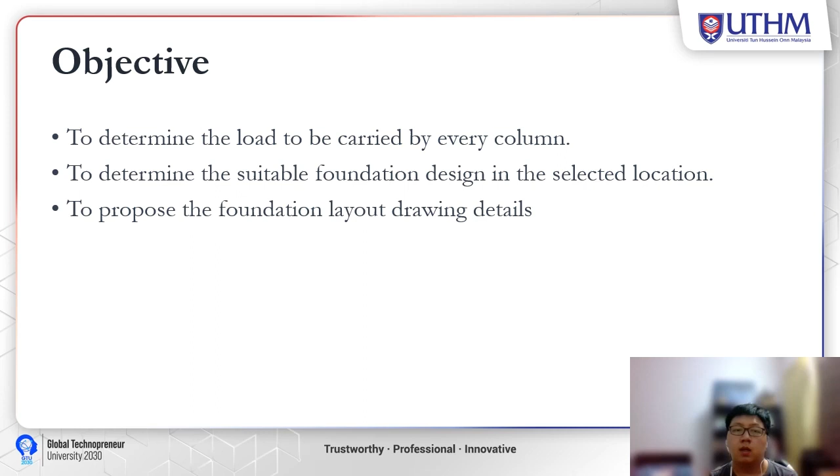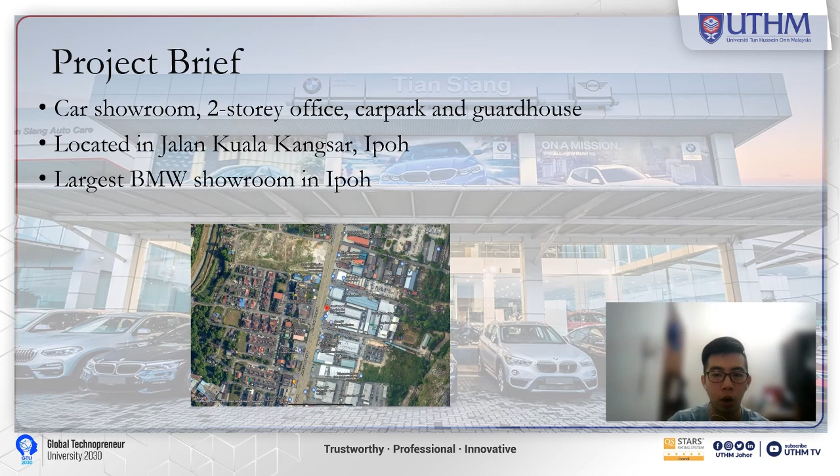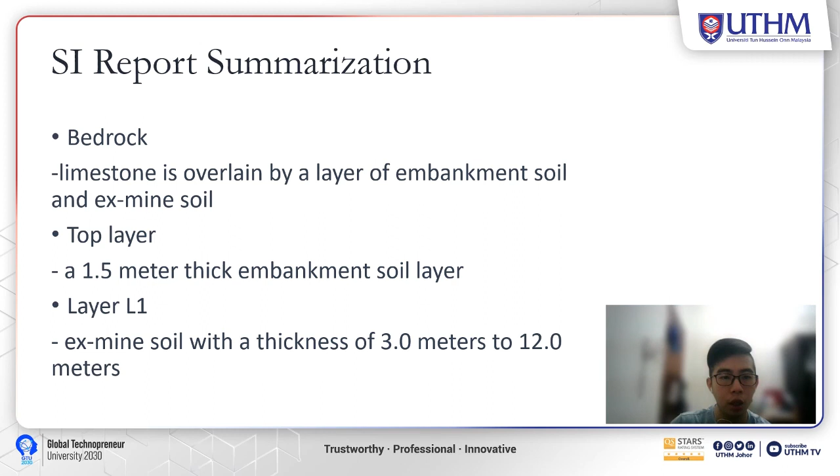Next, let's talk about the soil investigation report. The investigation carried out showed that the bedrock of the investigation site area consists of limestone overlaid by a layer of embankment soil and ex-mine soil. Observational data show that the top layer consists of a 1.5 meter thick embankment soil layer, and layer 1 consists of ex-mine soil with a thickness of 3 meters to 12 meters.

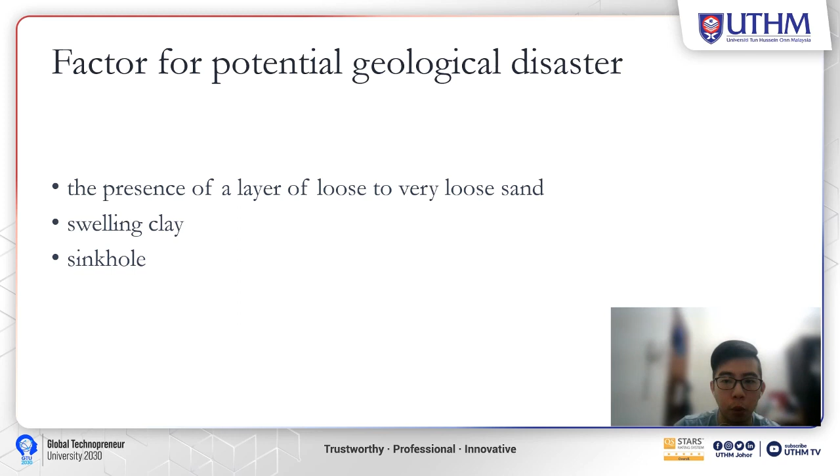The investigation carried out identified some factors for potential geological disaster that need attention, which are the presence of layers of loose to very loose sand, swelling clay, and sinkholes. Based on the report, we have no objection to the development if appropriate mitigation measures are given attention according to appropriate guidelines, and the work carried out is under the supervision of a professional geotechnical engineer.

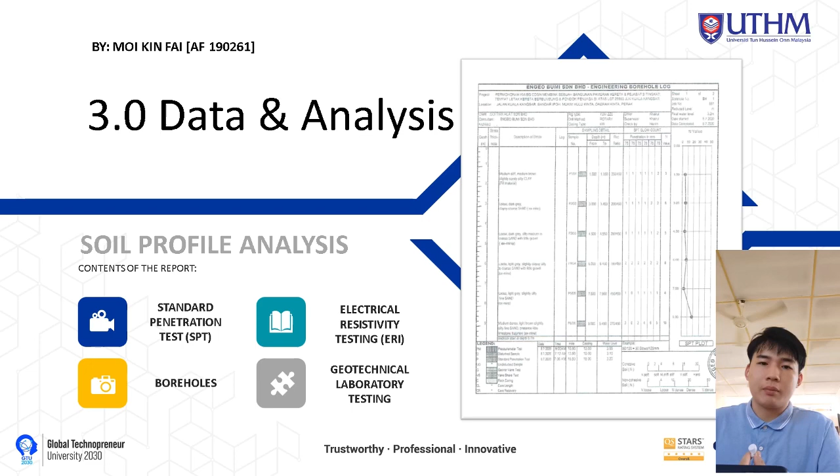The geotechnical report has identified two critical boreholes on the site, named BH1 and BH2 respectively. They utilize electrical resistivity testing, SPT, and some geotechnical laboratory testing for figuring out the mechanical and chemical properties of the disturbed soil sampling in the boring. As previously mentioned, they discovered that the subsurface consists of clay, dense compact sand, and limestone.

Some of the building specifications have been outlined following client specifications. The thickness of the slab on the ground floor and first floor is 100 mm and 125 mm respectively. The soil characteristics and the location of the heavy load cause the variation in the size of the column. Stump height varies between 500 to 1000 mm. The floor ground beams measure 225 x 600 or 125 x 600. High yield and mild steel are used as reinforcement for the in-situ concrete.

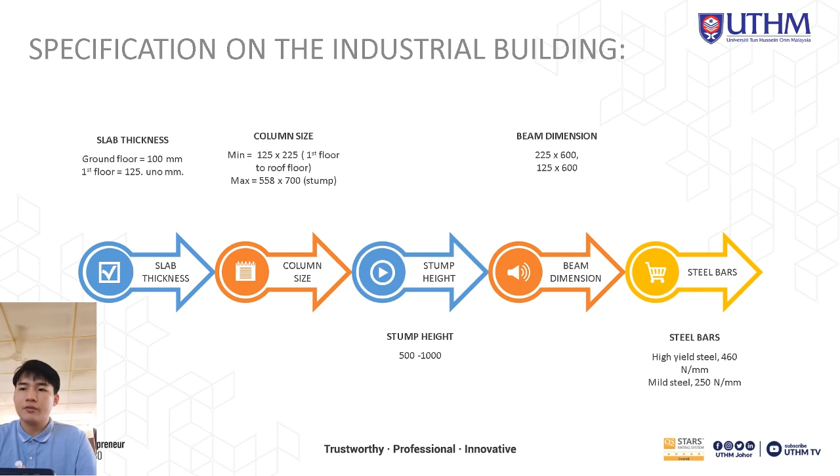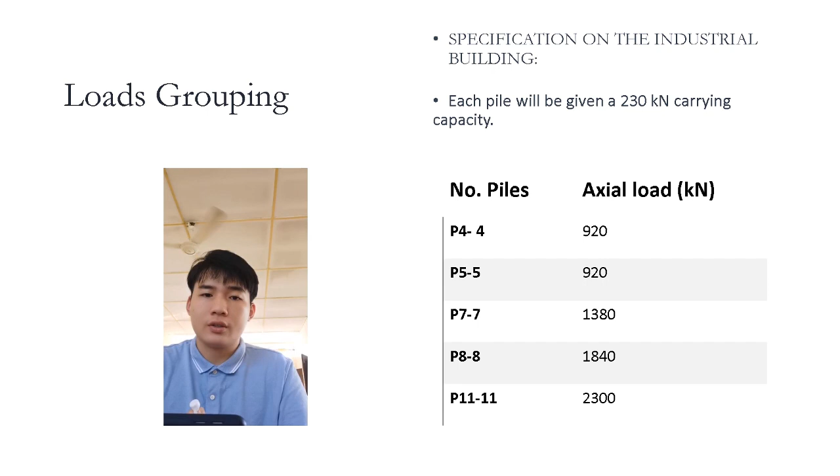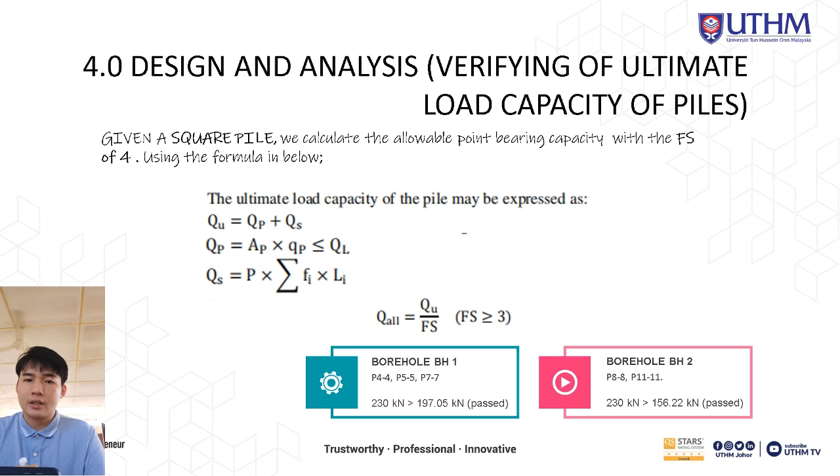Hi, my name is Liew and today I will be presenting total settlement and factor of safety.

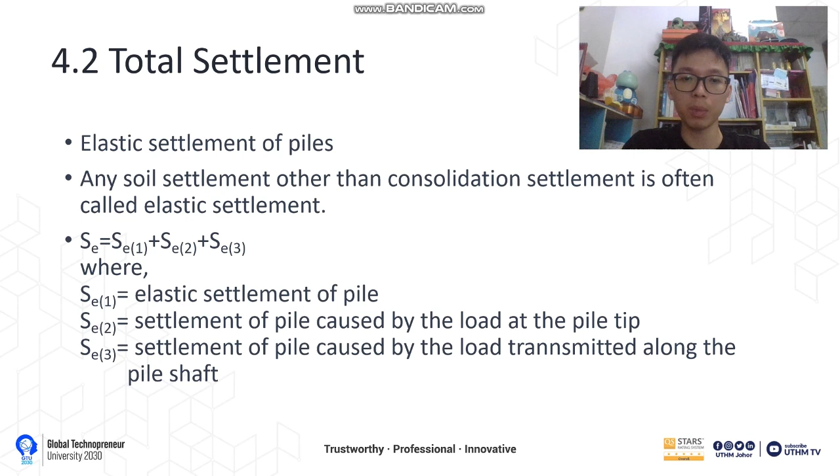In our project, we are using elastic settlement of piles, and the definition for the elastic settlement of piles is any soil settlement other than consolidation settlement. So the equation for the elastic settlement is SE = SE1 + SE2 + SE3, where SE1 equals the elastic settlement of piles, SE2 equals the settlement of pile caused by the load at the pile tip, and SE3 is the settlement of pile caused by the load transmitted along the pile shaft.

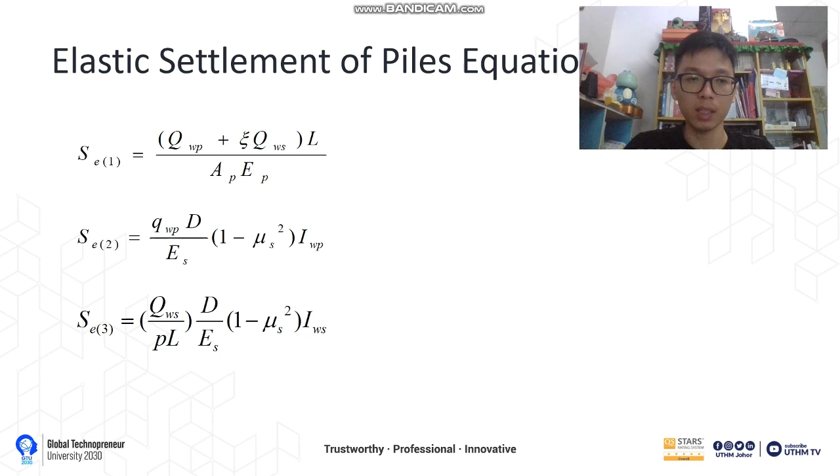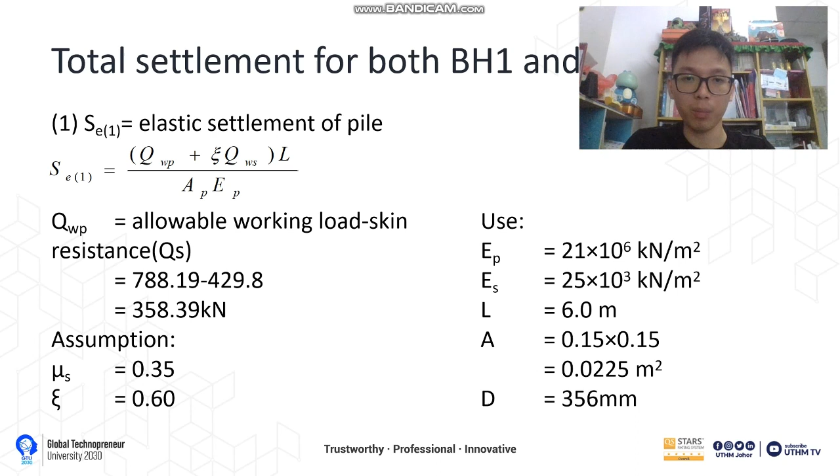Next we proceed to the equations, and here are the equations for the respective elastic settlements. I'm giving the example for borehole 1 in this calculation. So let's proceed to the borehole 1 calculation. The allowable working load and skin resistance we got from the previous session. So we proceed with the calculation and substitute all the parameters into equations SE1, SE2, and SE3.

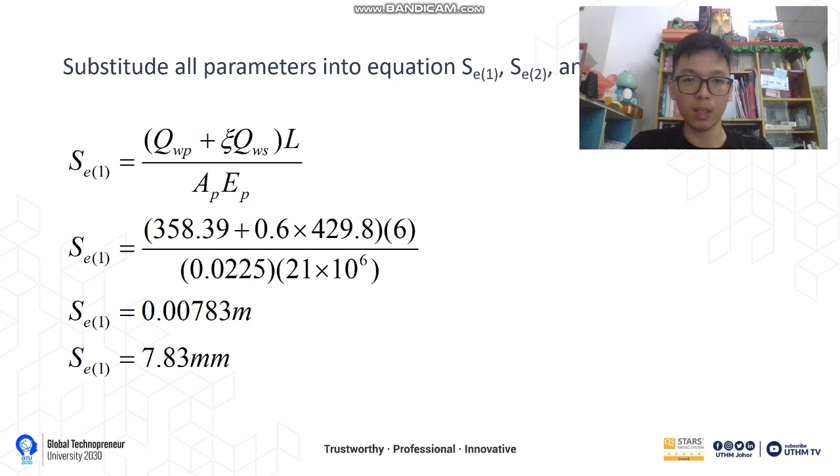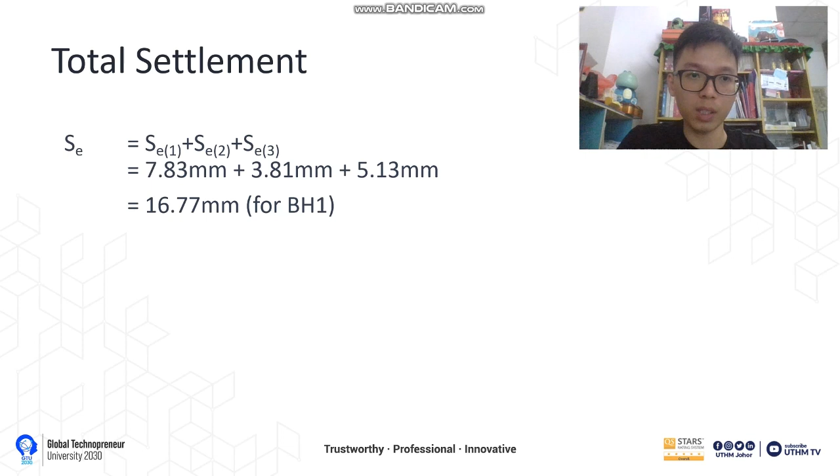So in this example, for SE1 we got the value of 7.83 millimeters, SE2 we got 3.81 millimeters, and SE3 we got 5.13 millimeters. And then we summarize the total settlement, and we got 16.77 millimeters for borehole 1.

Next, we proceed to the factor of safety. In the previous session we have the Q design of 230 kilonewtons, and we already got the Q ultimate, which is equal to 788.19 kilonewtons. To calculate the factor of safety, we just divide the Q ultimate by Q design. So in this calculation, we got a factor of safety of 3.43, which is larger than 1. So this is acceptable.

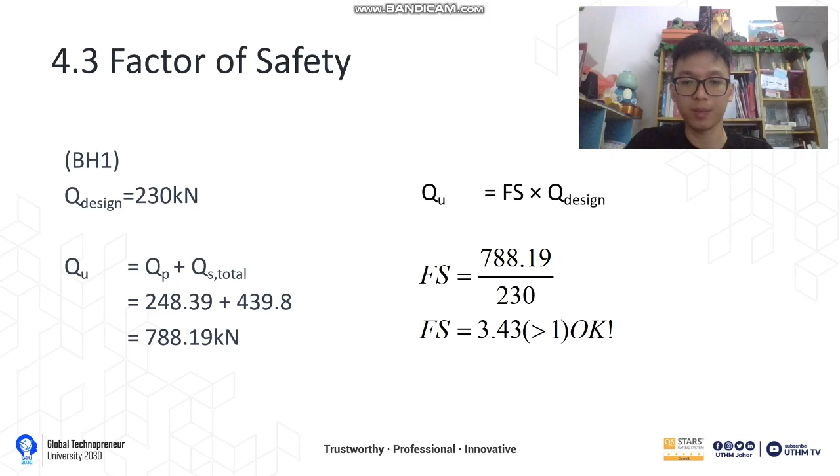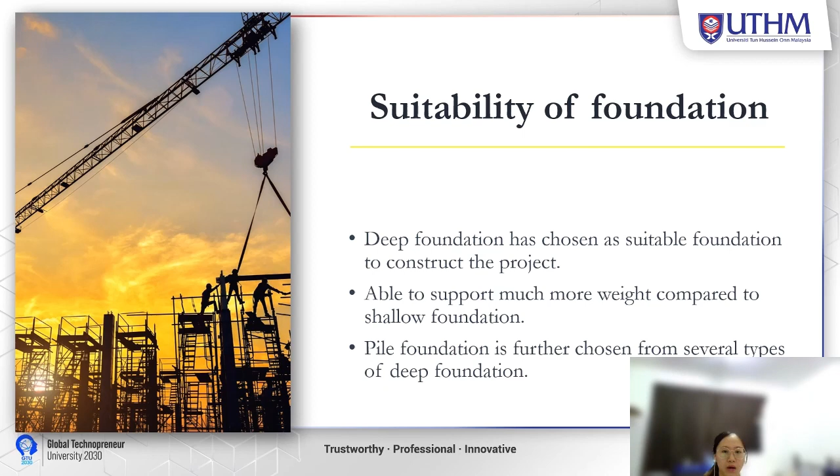Now I will continue to talk about the discussion and conclusion of our project. Based on the calculations we have done, we decided that deep foundation is chosen as a suitable foundation in this project, as there is inadequate bearing capacity for the shallow foundation. Deep foundation is more suitable as it can carry much more weight compared to shallow foundation. Pile foundation is then chosen from several types of deep foundation, as it helps decrease excessive soil settlement and prevent uplift forces. Piles can transfer the load to underlying rock or stronger soil strata.

Next, some considerations for designing the foundation should be made. The design of deep foundation comes with two basic requirements: it must have sufficient safety against failure and shall not undergo excessive displacement under the working loads. The following consideration is that the ultimate load should always be greater than the allowable loads against the factor of safety, and the settlement must be kept within the allowable limits to reduce the possibility of excessive tilting and angular distortion of parts of the structure.

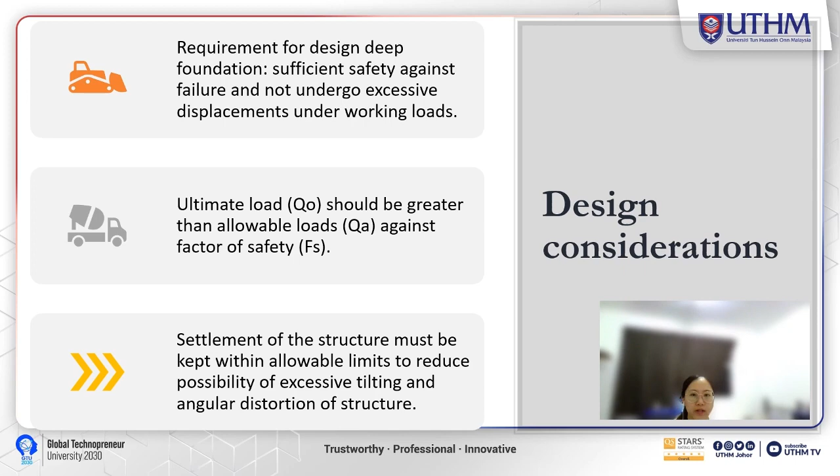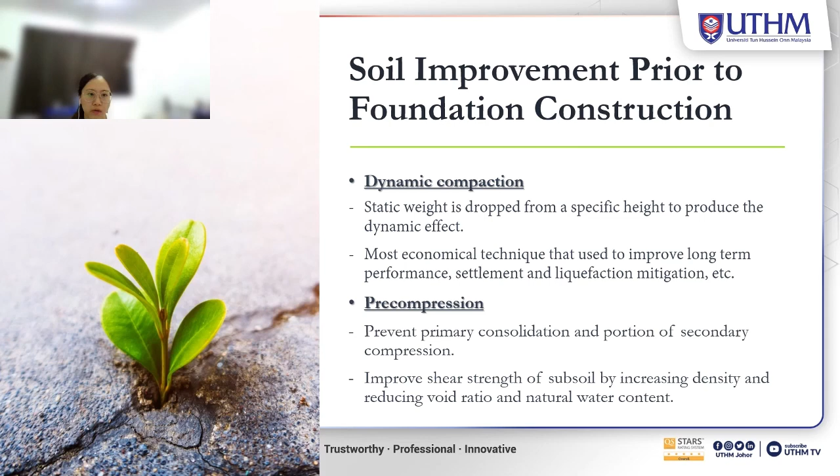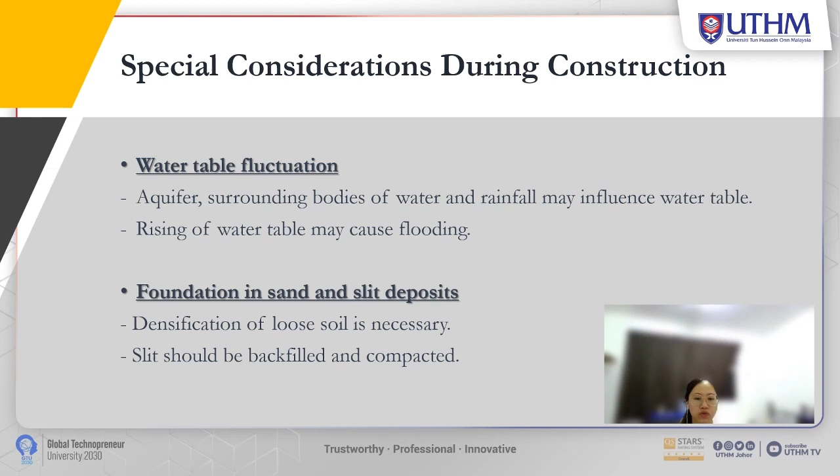While for foundations in sand and slit deposits, densification of the loose soil is needed. If not, the soil will flow away from the footing. If the soil is not confined, the density and bearing capacity will be lost. And the slit should be backfilled and compacted to provide a suitable foundation.

Finally, the foundation. Foundation is crucial to a building's long-term viability. If the foundation is not done properly, it can have a negative impact on the structural strength and stability in the long term. So based on our judgment, we believe that deep foundation is more suitable compared to shallow foundation in this project, and the objectives of the project have been achieved as well.